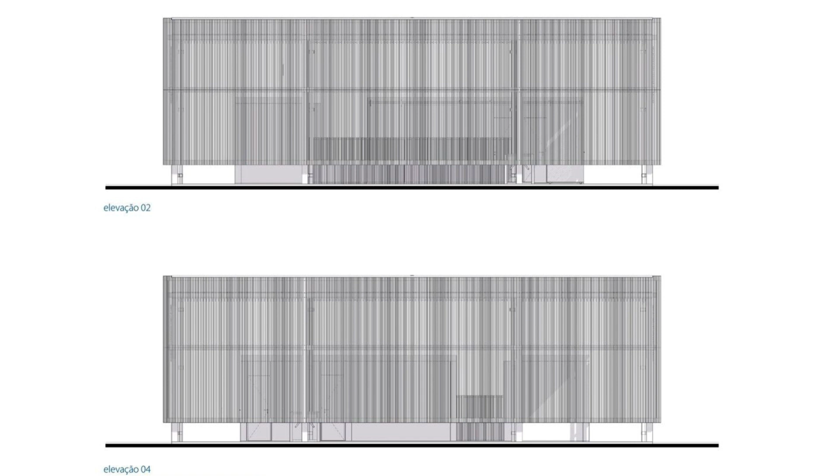The Praia complex was designed as an entertainment center on the edge of Paranoá, the artificial lake that surrounds the Plano Piloto of Brasília. However, public and direct access to the lake is still very limited, despite recent efforts by the government to improve the waterfront. The uniqueness of Praia is therefore supported by the intention to definitively appropriate part of the immense water mirror that borders the protected urban project and transform it into a kind of coastline in the federal capital.

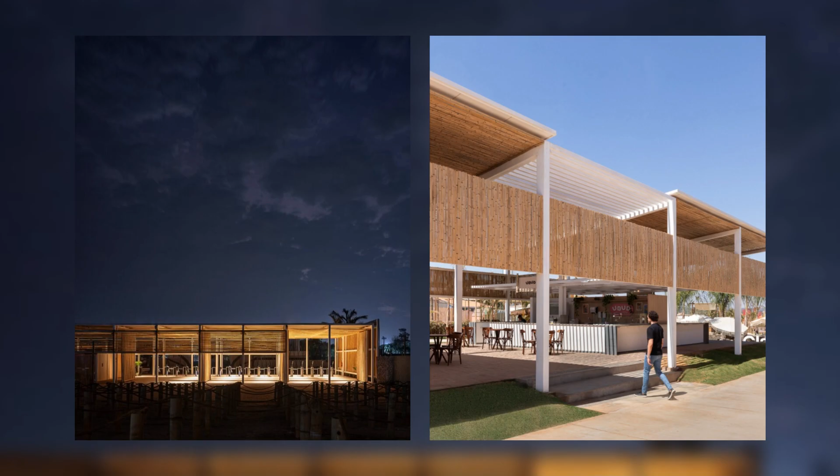Part of the constructions in the complex is scenographic because they have a temporary nature, with their duration limited to the event's calendar. Their design is connected to the creation of scenarios whose themes change each season. The other part of the complex consists of fixed infrastructure and permanent buildings.

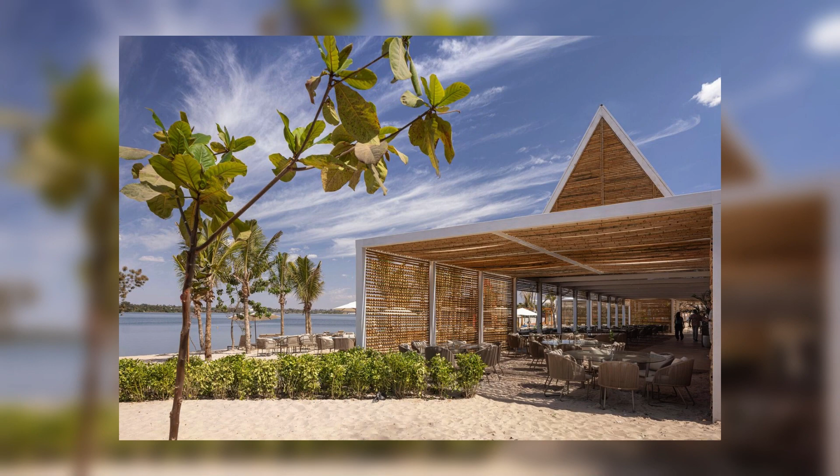In order to design the permanent portion, aiming to enhance the bucolic scale of the city without altering its character, the company responsible for the project was willing to select and hire architecture firms that, in their understanding, were aligned with these principles. Therefore, the architecture firms BLOCO Arquitetos, Estúdio MRGB, and ARQBR were invited to develop some of the architectural projects that constitute the fixed part of Praia.

The beach tent project was assigned to BLOCO Arquitetos, the access pavilion to Estúdio MRGB, and the shop and cafes, gastronomic village, and bar were assigned to ARQBR, completing the gastronomic complex of the park.

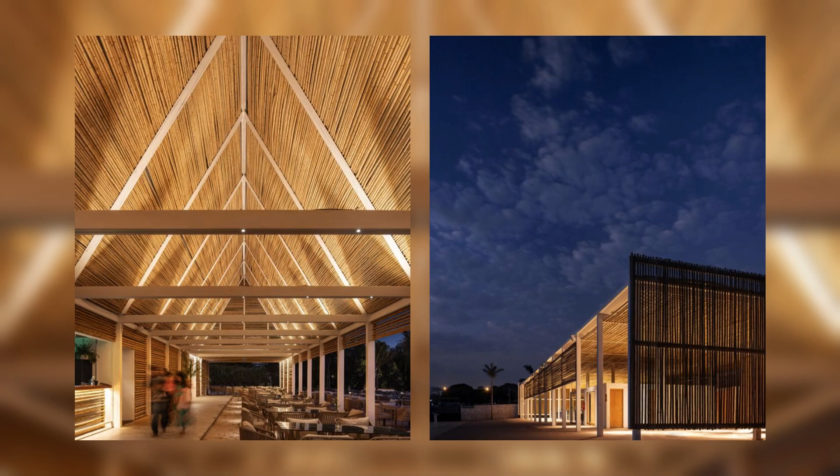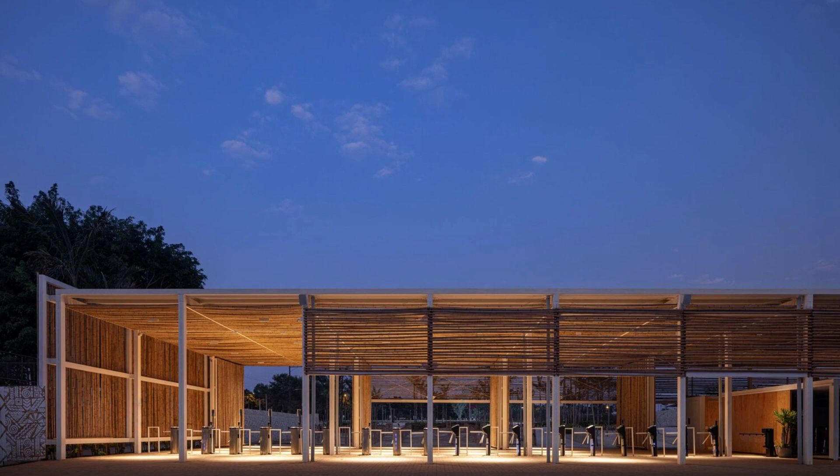Preliminary conversations and discussions among the architects resulted in some premises that guided the development of their respective projects, aiming to establish, while respecting individual design approaches, solutions that expressed austerity and unity in the built ensemble. This was achieved through the adoption of a contemporary architectural language, using sustainable materials integrated into an agile and rational construction system capable of addressing the various demands of the different stakeholders involved in the process.

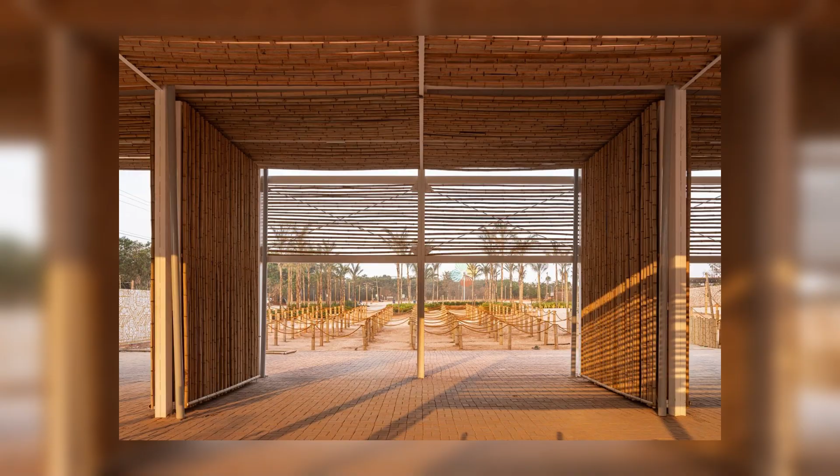The main constraints for the choices made in this phase were the extremely short construction timeline, 100 days, and the relationship between the budget and the availability of materials and labor at that time. Thus, a metal structure primarily composed of welded tubular profiles was selected as the most suitable construction solution, considering the constraints, cost limitations, and available time for the project execution.

Natural bamboo was chosen for creating shading elements, ceilings, or specific structural uses. Similarly, it is worth highlighting the valuable contribution of the landscaping project in creating unity at Praia. The majority of native trees were preserved, while other cerrado tree species were introduced in combination with exotic vegetation and palm trees that adapted well to the local climate.

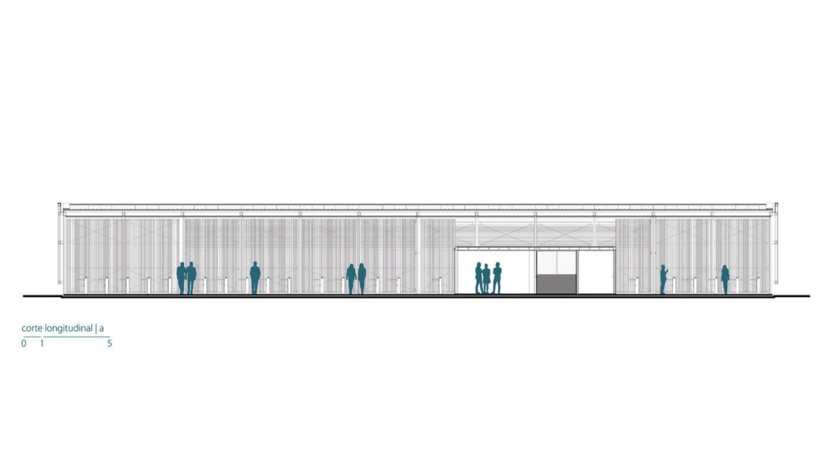Developed by architects Mariana Siqueira and Claudia Pelicano, the various landscaped areas and the creation of pathways were responsible for enhancing the landscape design and, particularly, the connection between the designed buildings.

The initial impression of visitors at Praia is shaped by the apprehension of spaces and experiences obtained while moving through the access pavilion designed by Estúdio MRGB. In this regard, the office sought a design that is simple and austere, whose horizontal character, like the iconic works in the city of Brasília, subtly affirms its discrete presence in the landscape. The building's main function is to welcome visitors and guide them to explore the various attractions of the complex.

With a frontage of 42 meters, a depth of 15.50 meters, and a height of 4.5 meters, the access pavilion takes advantage of the low impact on foundations resulting from the use of steel, allowing the structure to be built on a large raft foundation.

The rhythm and cadence that express the architectural language of the building are established by the strict modulation of the structure, with spans of 3.5 meters and 7.0 meters internally in the longitudinal direction, 4.25 meters transversely in the sections adjacent to the front and rear facades, and 7.0 meters in the central span, also in the transverse direction.

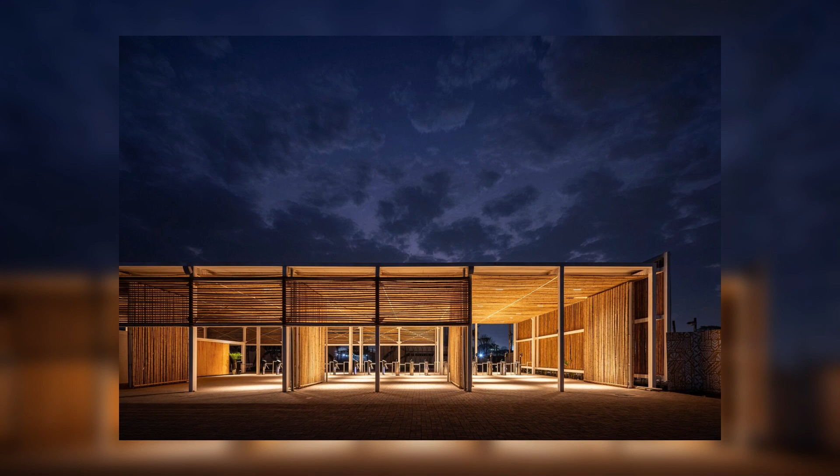The side walls and the brises, designed with the intention of incorporating bamboo as the main closing and ceiling element, create the intended beach atmosphere desired by the developers of Praia. Similarly, the ceiling of the pavilion, consisting of linear bamboo pieces, allows for the filtering of light, filling the central section of the pavilion with diffuse natural lighting.

This is achieved through the use of translucent compact polycarbonate coverings located in the roof, central span, and throughout the entire building. Regarding the program and requirements, the building houses the ticket office, restrooms, support spaces, and a VIP room.

The enclosures of these areas were mostly made of marine plywood, with the exception of wet areas that required additional installation infrastructure. The main intention of the project was to awaken in users a wide range of sensory aspects resulting from the combination of structural rigor, subtle lighting, and the rusticity of bamboo as the primary material shaping the project's materiality. The building housing the store and cafes utilized a metal structure.

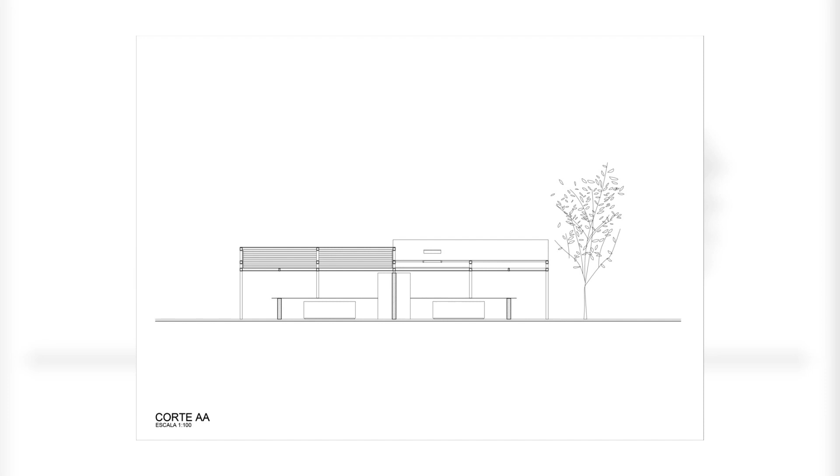In the floor plan, there are 7 spans of 5 meters in the longitudinal direction and 2 spans of 6.5 meters in the transverse direction, resulting in a modular layout of 5 by 6.5 meters that guides the organization of the internal spaces. The structure, painted in white, contrasts with the natural bamboo which is present in the ceiling, the entrance doors to the store, and the brises.

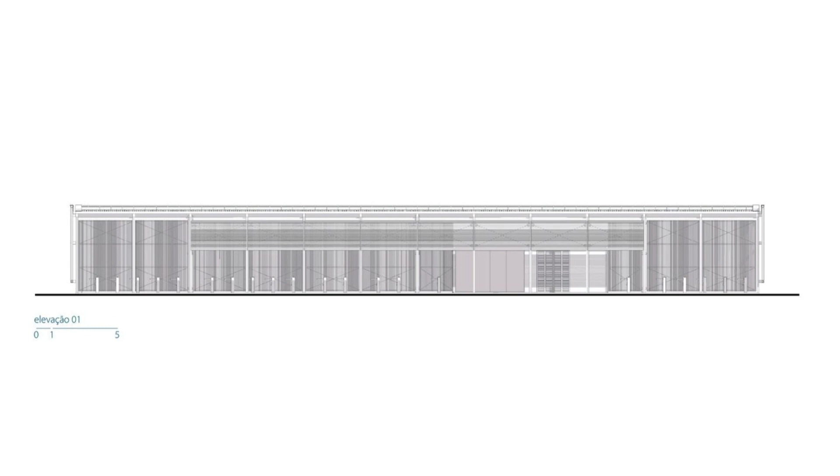The buildings in the gastronomic village, which house food-related operations, follow the same materiality pattern as the store and cafes. In this case, however, the structural spans are different, resulting in modules of 4 by 8 meters. The design of the beams that span the 8-meter spans is also different, as flat triangular trusses were necessary for this span.

The beer bar stands out for its use of bamboo as the sole structural element. The entire structure is generated from the composition of triangles which form beams and pillars, creating a cohesive structural assembly that connects to the ground without touching it. This is achieved through rebar rods anchored in small concrete bases.

The rationality applied in the choices of structures and construction processes was aimed at associating the intended beach ambience for the village through the use of natural bamboo as desired by the festival's creators. Finally, the store and cafes, gastronomic village, and beer bar, located around a square that welcomes visitors, are interconnected through materials and scale, emphasizing the human dimension that characterizes the architecture and urbanism of Brasília.

The beach tent was designed to accommodate a restaurant, bar, kitchen, an area with showers for beachgoers, and public restrooms. Within the complex, it is the closest building to Lake Paranoá, located at the lowest elevation of the entertainment complex, as the natural topography gently slopes towards the lake. Therefore, the project was also conceived to serve as a visual landmark for a portion of the ensemble.

Its ridge, the highest point of the construction, reaches a height of 8.80 meters, making its shape serve as a visual landmark within a predominantly low-rise, single-story building ensemble. Its function as a reference point in the landscape can also be observed from the water mirror of the lake.

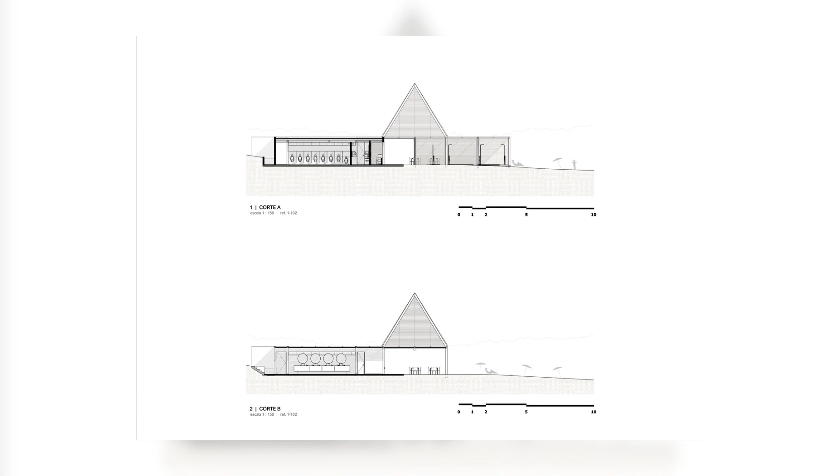Natural bamboo was used in various ways, including ventilated brises or ceiling shading, open pergolas, pergolas covered with glass, and finishes for ceilings under insulated tiles. Lightweight enclosures made of cementitious boards or plasterboards define the enclosed spaces.

The sand used in the scenic landscaping near the lake was also used as a flooring material for part of the dining hall. In that area, the placement of tables alternates between covered and uncovered areas, arranged directly on the sand or on concrete floors.